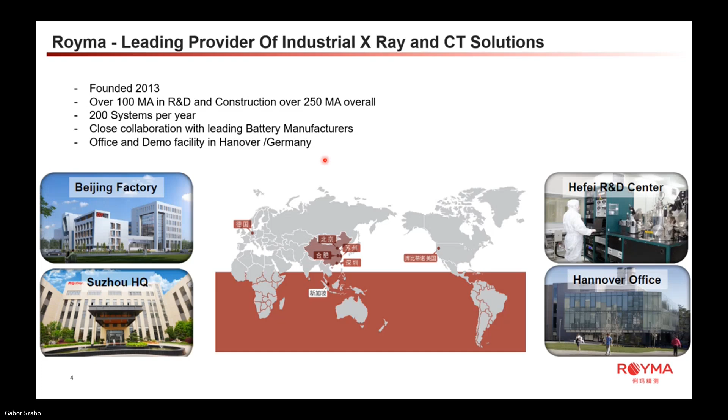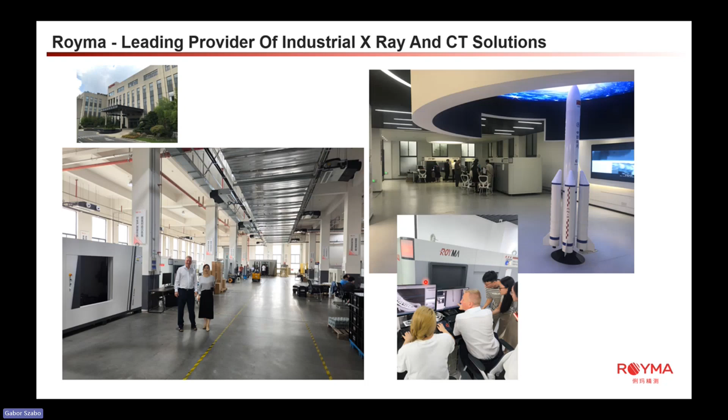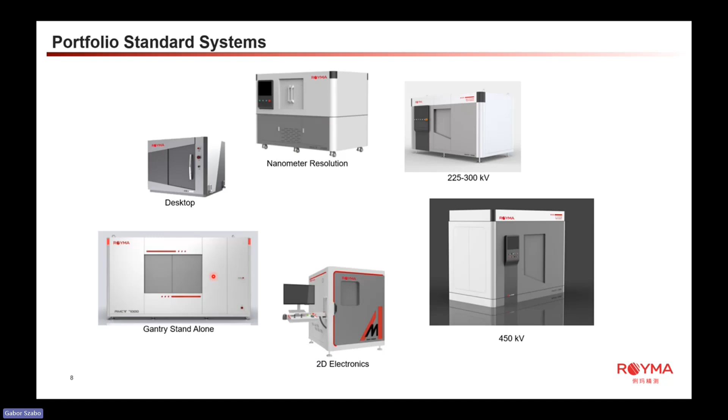What is already a bit special is such a laboratory system with a gantry system inside. These laboratory systems are not a topic for today, but perhaps also interesting for you to know that we have also very special systems. Topic for today is more our inline capacities. And as you see here, you see again and again the name gantry. After this meeting, you will know exactly what we mean with gantry, and you get also insights about the planning of the productivity, also a real task about the productivity on the next pages, which is the topic for this webinar.

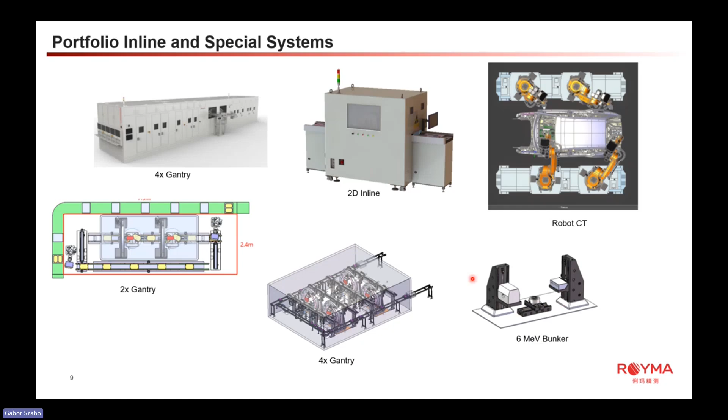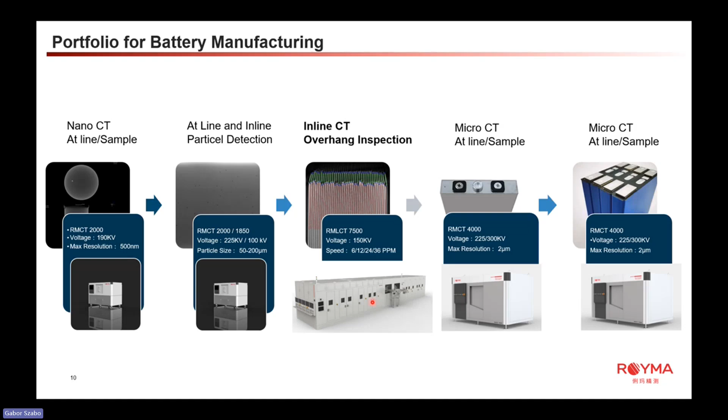Then we have here our inline systems; we hear more about them on the next pages. And of course, we use the standard laboratory CTs, which can all work together with robots to scan also a whole cell or whole module. So the inline system doesn't fully replace the other CT systems. It's an add-on. And on the next page you see some figures so that you understand how you improve the productivity with such an inline 3D system.

Some of the Chinese manufacturers also use our systems before the canning. Here it's not 100% sure why they do it. One point is you can scan a bit faster before the canning with the systems. That's true. And I guess because these are the really big manufacturers, they simply make experiments in single production lines to see the effect if you scan before canning, after canning, or before and after canning. This we also have in China. Our recommendation is to scan after the canning and after the welding.

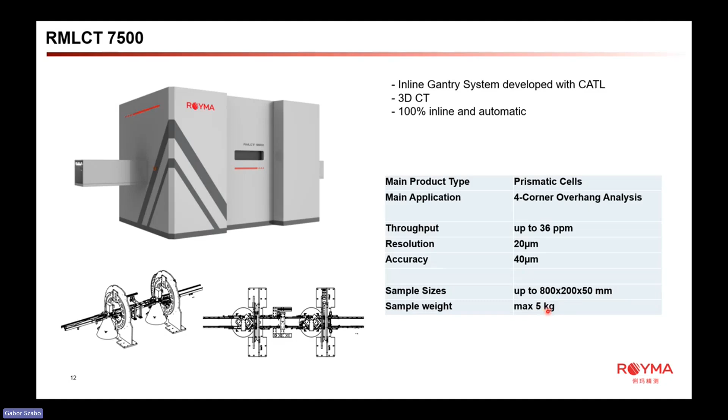and also here the 200 millimeters are not a deadline. Also, if your sample is a bit wider, we can scan the sample. The sample weight with 5 kilograms is absolutely sufficient for all standard prismatic cells.

Why did CATL start development with Royma for a 3D system? CATL also used inline 2D systems in the beginning. They have the advantage that they can easily get a very high throughput, but they have the big disadvantage that you have a high misjudgment rate with a lot of false positives and a lot of missed failures.

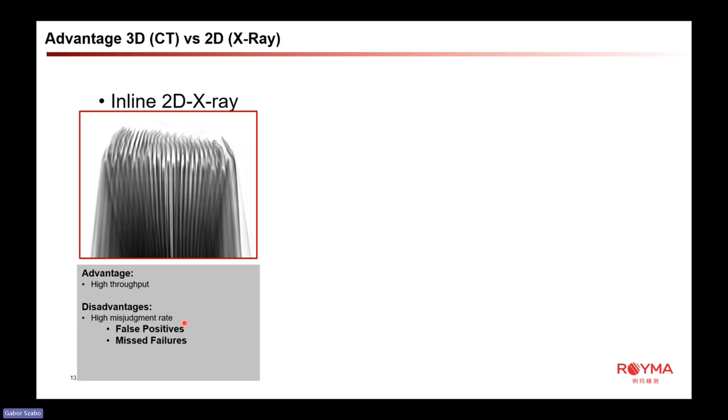That's why it's very typical, especially in the beginning of production and the ramp-up phase, that customers in China used at-line 3D CT, and also in Europe, the plans of a lot of gigafactories are to use a lot of at-line CTs in the ramp-up phase. The advantage of the at-line CT is that you have a high accuracy, but of course a very low throughput.

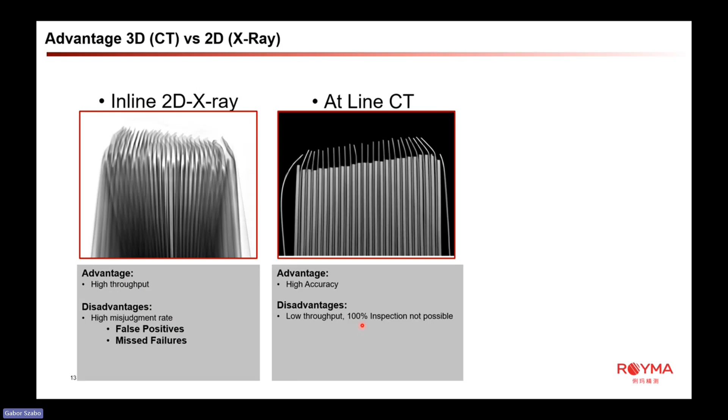And we discuss at the moment also plans to use several CT machines at-line. And here we have to go really into the details in the next weeks, whether this is really necessary or if we can reduce the number of at-line CTs and replace them with inline CT. This will be an interesting discussion in the next weeks.

Together with CATL, we developed the inline 3D CT, which combines the advantage of the high throughput from the 2D systems with the low misjudgment rate from the 3D systems. And you get with these systems a very fast ROI. As I told you, on the next page you get more information about the return on investment.

There are also disadvantages, of course, of the system. It has a bigger footprint than a 2D system, so you need more space in the factory. And with the inline 3D systems we scan only the edge of the cells and the upper end and the lower end of the cells. So typically we don't scan the whole cell with the inline 3D CT. So there is still the necessity to make statistical process controls with at-line CTs.

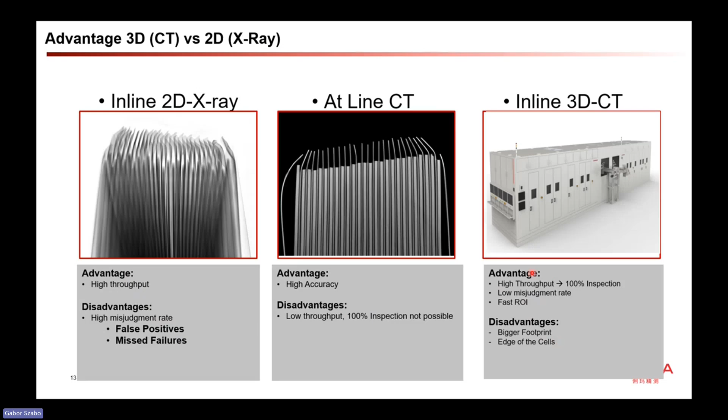Here you see some 2D images, simply to see where the problems are and why you have a high misjudgment rate with the 2D X-ray. The 2D X-ray is very fast, but has the big disadvantage that you always look only from one direction through the prismatic cell or through the edge of the prismatic cell. And depending on the direction, you have limitations in what you can see and what you can analyze.

And here you have a very typical limitation. For us, for the human eye and human brain, it is very easy to analyze this image and to see that these cathodes already look... I'm not 100% sure if they are okay, but I would say they are okay. The overhang seems to be okay.

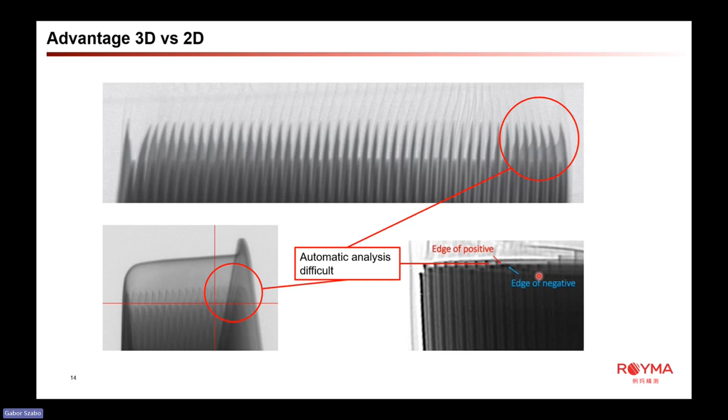For an automatic analysis, such an image is extremely hard, up to impossible, to analyze correctly. And in the end, it can happen that you sort out the prismatic cell, even if there is no damage or no failure inside. Also here you have an image which is very hard to analyze for an automatic 2D system, and also here you have a kind of image where it is simply hard to look through it and to make a clear decision if it is okay or not okay.

I told you that in China, and this is also special information from China, the gigafactories always scan all four edges, and they have the failure. And if they have the failure, we have to expect that we have the failure in Europe too, that only an edge of the prismatic cell is folded, like you see it here in this image. Here in this case, the cathode is folded, and you see the electrodes by themselves are lying quite perfect over

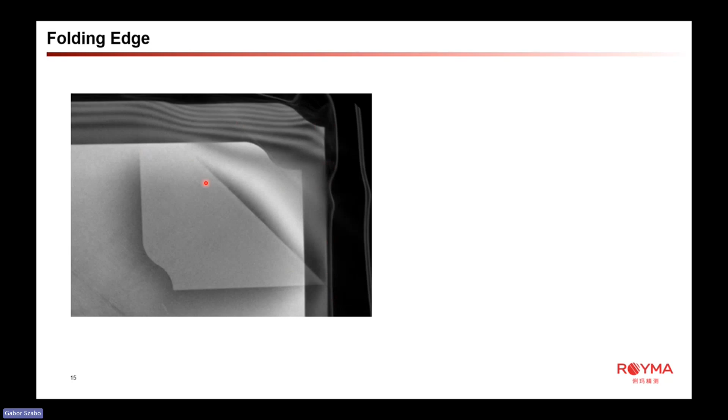the other cathodes, but you have these problems with the folded edge, and that's why always in China the customers scan all four edges of the cells. Here in Europe, I got the approach in the last 2 years from customers that they have the idea, or had the idea, only to scan two

diagonal edges to see if the electrode is lying a bit wrong or a bit tilted, but you wouldn't see such a folded edge if you are looking at the wrong edge with the analysis. So this hint from us: from the beginning, start to plan a four-edge analysis of the electrodes.

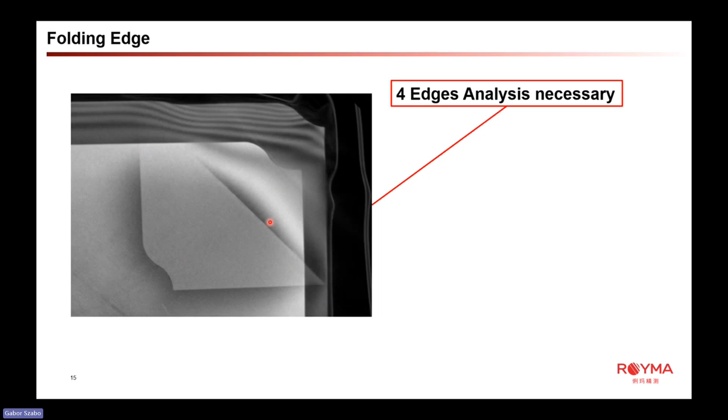And I got the figures from China that between 10 and 40% of all prismatic cells are ejected at the overhang inline checks, especially from the 2D solutions. And the 2D solutions have a false positive rate of 10%. So 10% of the ejected cells are false positives. So it means that between 1 and 4% of the production is simply false positive and is lost for the production.

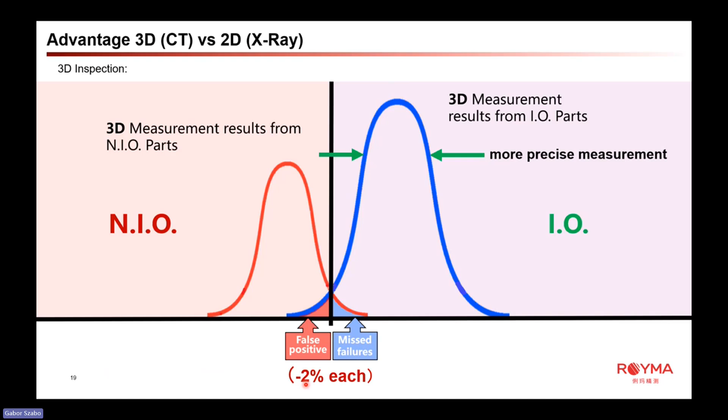On the other side, we also have a high rate of missed failures if you use the 2D measurements. With the 3D measurements, you have a dramatic decrease of the false positives and the missed failures. I got the figures from China that the false positives and the missed failures decrease around 2% each, absolutely, for the whole production. And the decrease of the false positives alone, about 2%, is already a productivity improvement of 2%, because then you process these good cells further in your process line, and you simply have more good, in order produced cells, and 2% more productivity.

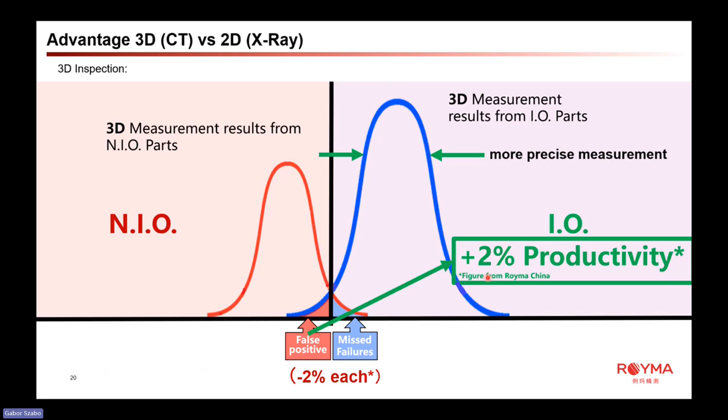Also here I made the remark, these are the figures I got from Royma China. And this is important information from me to you, and also a question from me to you, that I want to make more tests together with you in the next months and get more information from you with your experience and your figures. Of course, I cannot share the figures freely because we have NDAs with each other and competition issues. But it would be important for me to get a validation or verification of these figures, so that I know how valid it is here in Europe.

How we make our forecast for the return on investment. And we start with the false positives. And here I was a bit astonished. Some of you already have running production lines or are still in the ramp-up phase. But the simple question, how many of your cells are ejected from your inline inspection, especially for the overhang, I didn't get the answer from you. And I'm a bit wondering about that, because for me it's very clear that you need to know how many cells you eject at the different inspection points.

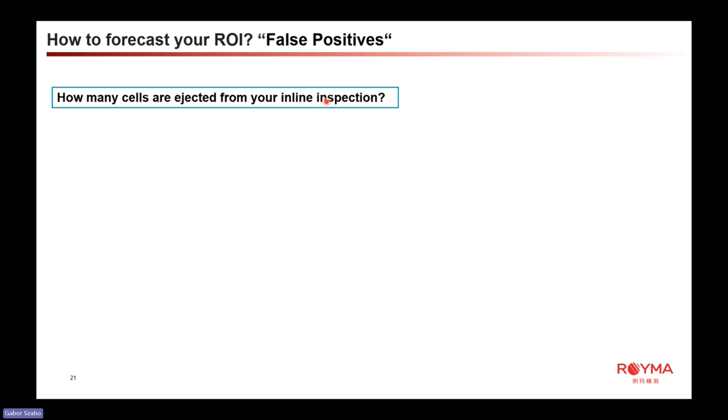And when I ask you for the ejections, I also get some questions back from you. For example, which kind of stacking the Chinese competition manufacturers use, and how these stacking methods influence the ejection rate. And here I cannot give you a clear answer at the moment. We know that we have Z-stacking, cut and stack, and fly stacking, which is a very modern kind of stacking. But we have no figure yet from China which stacking causes what ejection rate

in the inline inspection. And also important is that the previous process steps already have an influence on the ejection rate. And this is also interesting for me to learn in the next months, what the influence of these different process steps and stacking methods is on the ejection rate. Also important for the ejection rate is the cell design you have, the thickness of the electrodes you use.

This is simply a factor which influences the ejection rate, and when you change your cell design, you will also have an effect on the ejection rate. Important also is the kind of pressing you use after the stacking.

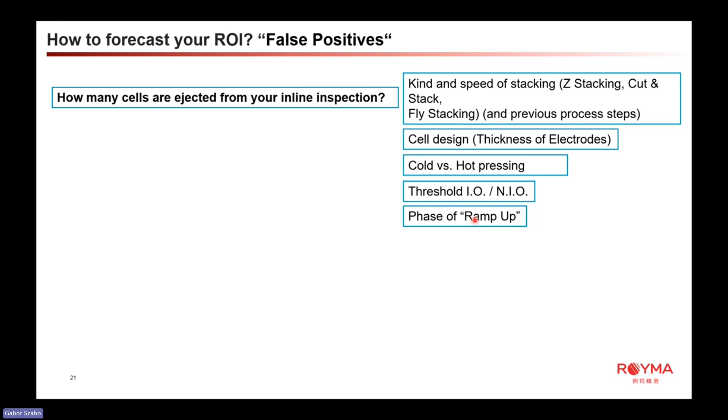And of course, important for the ejection rate is the threshold, where you set the threshold. And important, and we have to take this into consideration, is in which phase of the ramp-up you are. When you start, you have a very high ejection rate; when the production is running and you find the right process parameters, then the ejection rate will be lower. This is something we have to take into consideration.

When you count the ejection rate, this is simply counting the amount of cells which are ejected. Then we have to check how many of these ejected cells are false positives. You can use the laboratory CT you typically have in your factory to test the ejected batch and see how many of the cells are false positives. If you don't have a laboratory CT, we can also do such tests for you in Hanover. We have the abilities to do that.

And then, this is the final point to calculate the ROI: we make the counter check with our Royma systems in China. There we have such systems and we can test your batches there. Then we have a figure for how well our system worked with the batch, and then we have a clear idea for the return of investment.

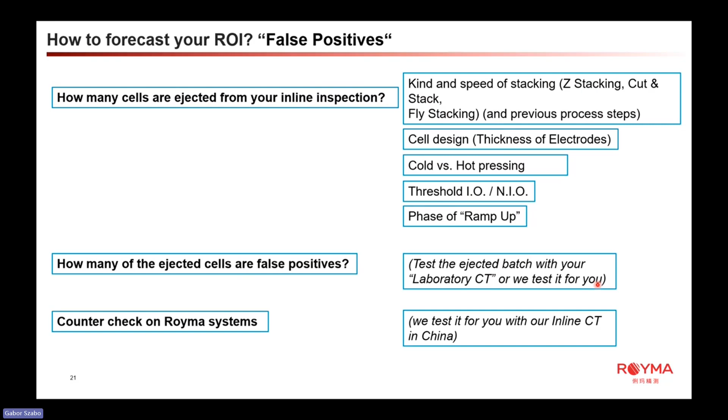How do we make it for the missed errors, for the missed failures? The return of investment effect from the missed failures is not as big as the effect from the false positives, because the missed failures are normally found later in the process, in later process steps like the formation.

But of course, you have production costs on the cells which already have a failure. So normally, if you find the errors in earlier process steps, you save a lot of money. Especially the formation is very expensive, and if you have formation capabilities free for good cells and can produce good cells, that makes much more sense than producing cells which already have a failure inside. And the risk that you deliver cells with a failure to your customer is higher if you don't sort them out in production.

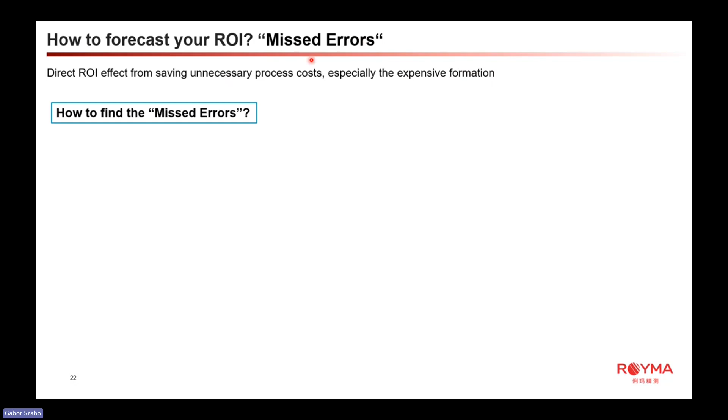So how to find the missed errors? One possibility is that you make a statistical check after the inline inspection, so you simply take out the cells which are not ejected and check these cells to see if they have a failure, if they are wrong cells. You can do this check directly after the inline inspection, or you can take out the cells from the end control of your production line.

Also a very efficient way is to take the ejected cells from later process steps. So if the formation gives you the signal that the cell is faulty, then check the cell and look at what the failure is inside the cell. Is this a failure, for example, in the overhang? Then we have a typical missed failure in the inline inspection for the overhang. So you have a very efficient way to find these cells.

And also here, make the counter check with the Royma system, which we would do together with the batch of ejected cells from the false positives. So we have the missed failures, the false positives, and the found failures. With these figures from you, we can test our system, get our figures, and then we have a very clear basis to calculate the return of investment.

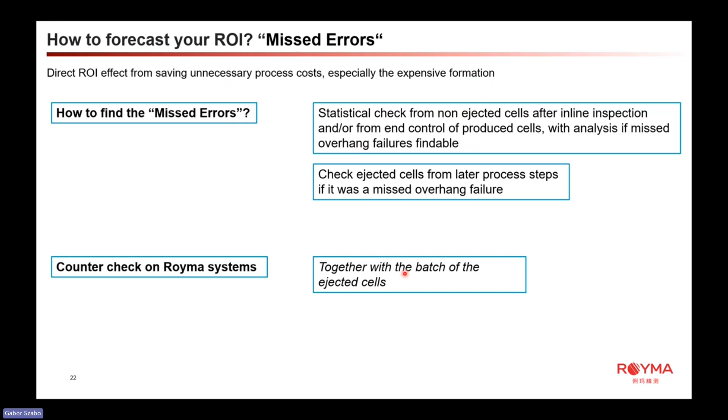If you need my help for these processes to make the statistical analysis and so on, I can help you so that you don't have to reinvent the wheel by yourself. Then it's a bit easier for you.

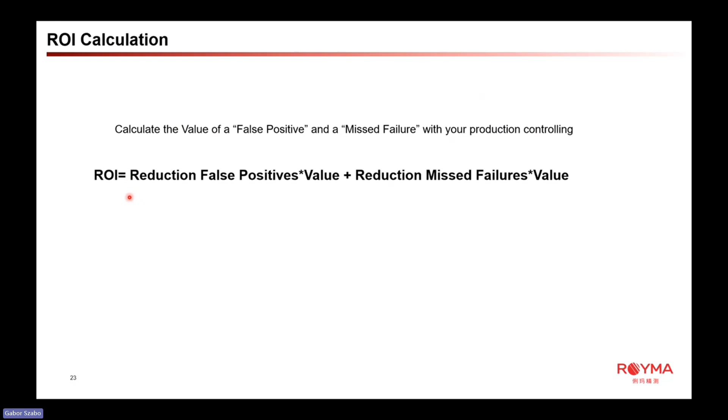I made this page only for fun. Of course, you need for every false positive and for every missed failure a value. You get a value from your production controlling - I cannot calculate this value for you. With these values, we can make a simple formula to calculate the potential return on investment and have a clear figure. With this figure, it's very easy to decide if it's a useful investment for you to invest in an inline system, or perhaps if it's not useful.

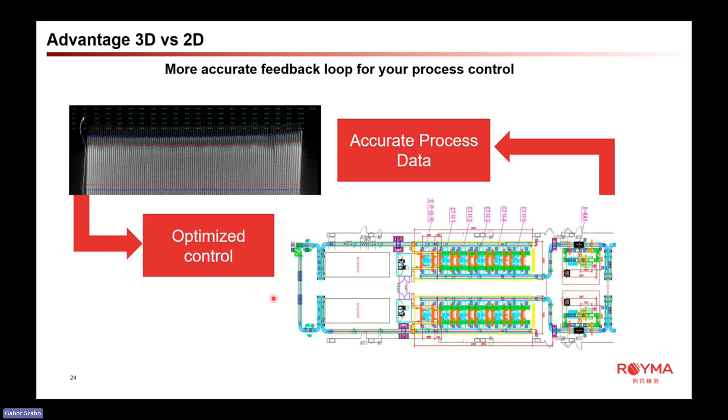There are more advantages if you use a 3D system instead of a 2D system. You get from the 3D systems much more accurate results, and these help you optimize your process control. From our gantry inline systems, you get more accuracy, and with higher accuracy you have better control of your process before the inline analysis from the overhang. This is an important advantage which helps you ramp up your production and find the right parameters for your production.

Also an important point is that you are future-proof if you invest in a 3D inline solution. At the moment, discussions are running in China, but also starting now in Europe, about how to make a certificate - about best practice or a battery pass or battery quality certificate. It's to be expected that part of this certificate is the use of 3D inline inspection.

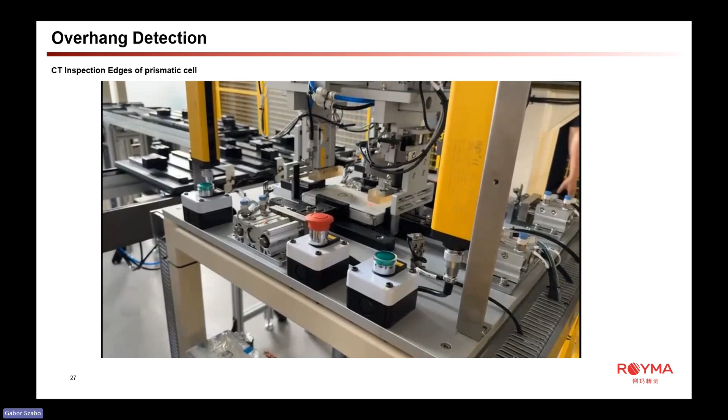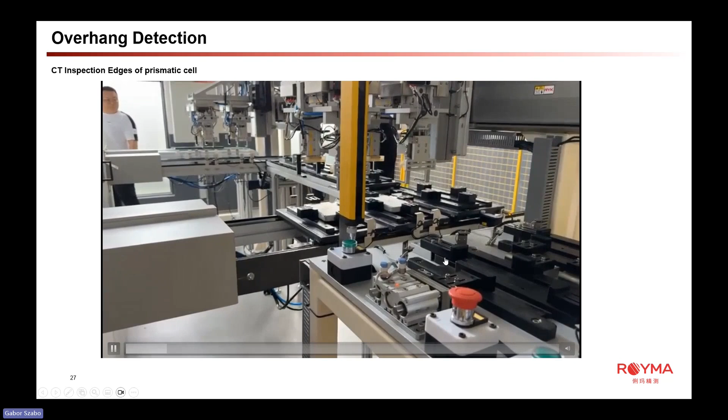And here I have also a video for you. I have to switch off the laser pointer and then start the video. We won't watch the whole video, it's a bit too long, and it's with the original sound from the Chinese colleagues who make some comments about the production line. In this case, it's our test line where we make experiments with software, with hardware, with different customer cells.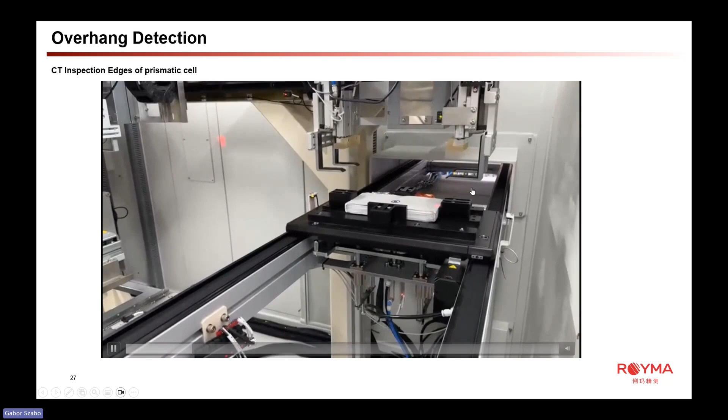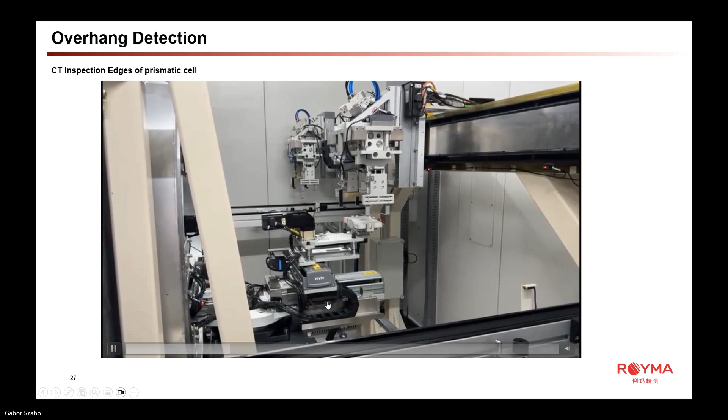There you see the cells coming inside. We have several pickers inside the system to enable high throughput, even if the pickers themselves move slowly to secure the cells. Then the pickers put the cells on this round table, and the round table drives the cell inline through the gantry system, the same from the other side, like you see here. And then we make the scan of the edges.

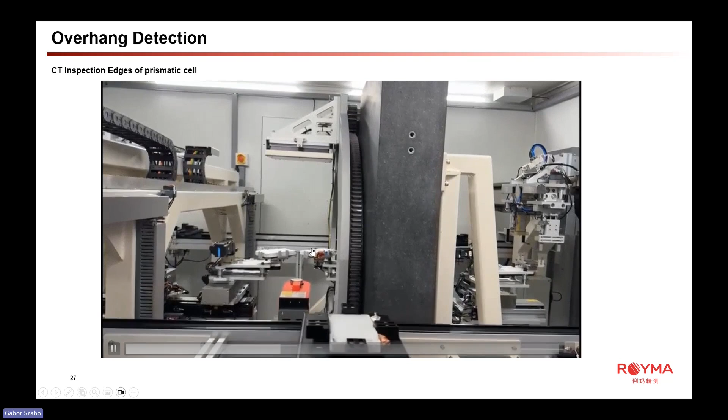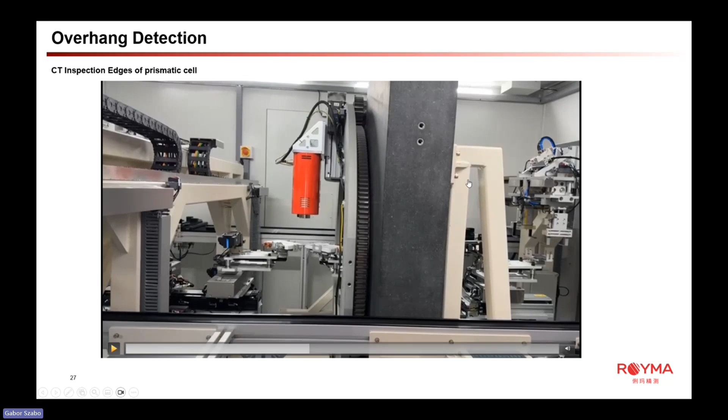In this case, we have two cells together, so we make with one scan two edges. And very often we can put two cells over each other, so we make four edges with one scan, or sometimes we can put three cells over each other if the cells are very slim. Here I stop the video because I guess at this point it's already very clear how the system itself works.

Here you see how we scan it - you saw it in the video. We have edge to edge, and we make a field of, in this case, around 64 millimeters, where we scan a range from the cell itself. And we make cuts 8 millimeters away from the edge of the cell, where we make the overhang measurements, in 2 dimensions.

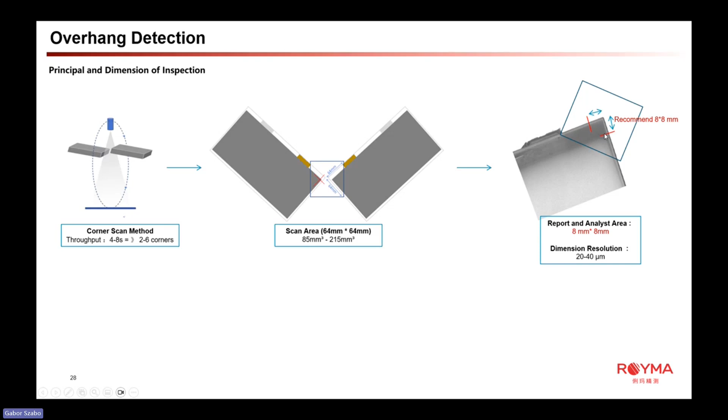And here you see how it looks like in practice. These are customer samples, and you see here how we play together with inline systems and also with offline systems. In this case, the customer wants to scan all four edges, A1, A5, C1, and C5, but also the welding at the position A2 and A4.

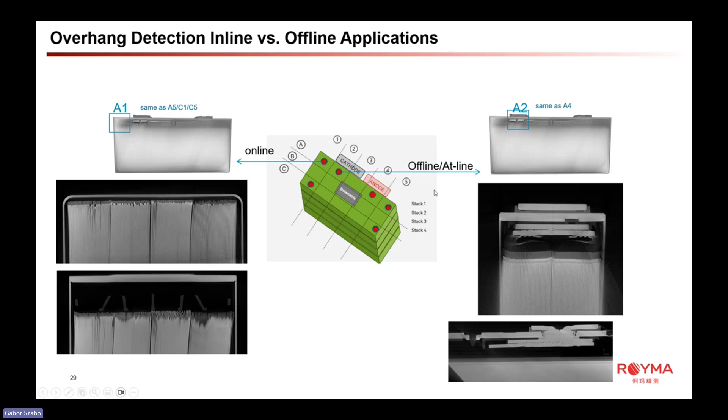What you see is that we do the edges online with our inline CT - you see the images here. And the welding we check offline with statistical process control, and you see here how we check the welding. This is very typical in China and will be the same in Europe, that we combine inline and offline CT systems.

Here you see how it looks like, such a 4 up to 8 second scan from such an edge. This is the original scan quality. You see it's a bit blurry and a bit noisy.

We use artificial intelligence to optimize the image, and then we use an analysis made by Royma themselves to analyze the overhang, and you get a data file in the format you want with the results from the scan. And this information you get into your ERP system or production system, so you can work with these figures. And of course, we sort out the cells which are not okay.

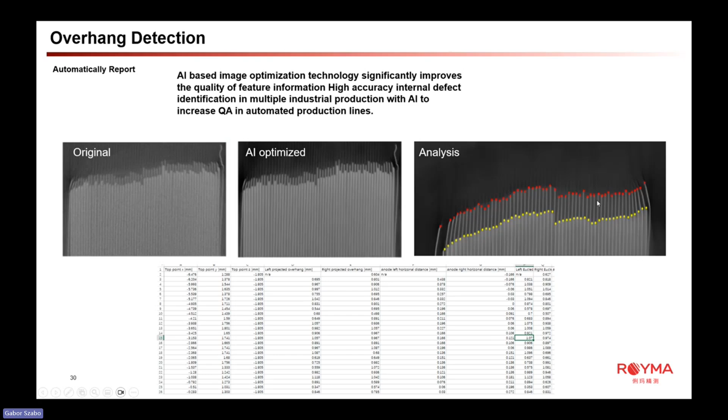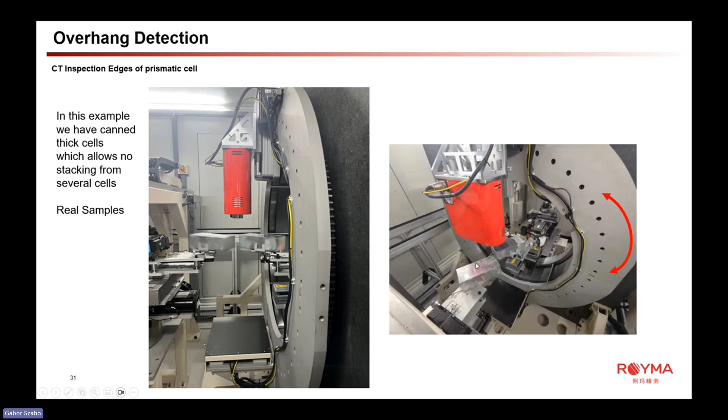Here you see it, how it looks like, also here with real customer cells. That's why I blurred the cells a bit, so you cannot see any details from the cells, and you see how it looks like.

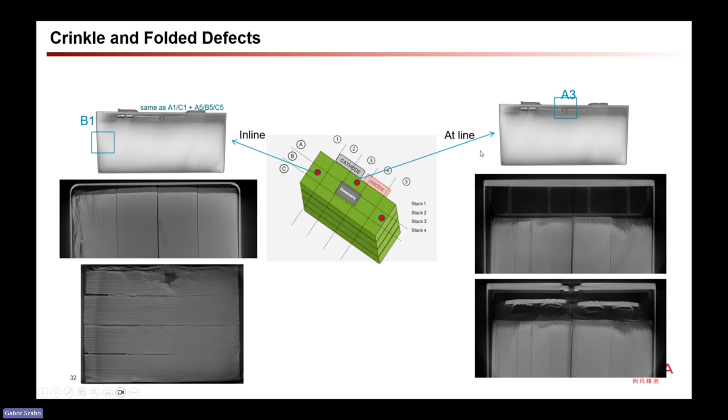Here you see an image from a whole cell, how we do it inline, so you have simply an impression how it looks like. And here you see how we position the cells if we make such a scan on the top of the cells.

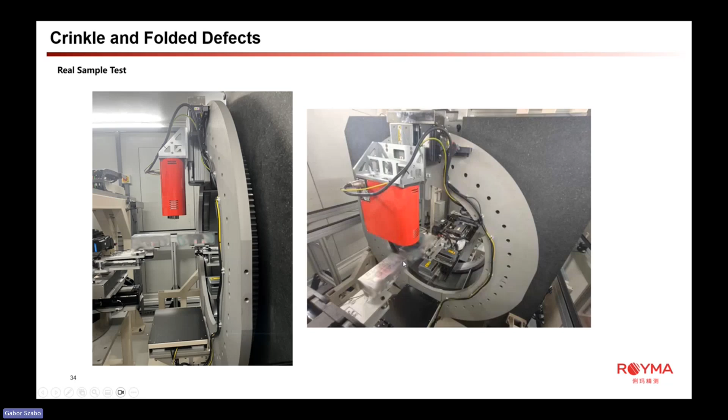Okay, here are only some overviews for you. This is such test equipment we saw in the video, only with one gantry to make general tests, and also with your batches you send us. Hopefully we can test with this installation.

And this is a typical installation for the customers. Here you see we work with 4 gantries to ensure the throughput. In this case, we use 2 gantries for the overhang detection, and 2 gantries for the crinkle detection. And you see here, in this case, we have 16, or over 16, 8, 16, 32 pickers. With the amount of parallel working pickers, we ensure the throughput of the installation.

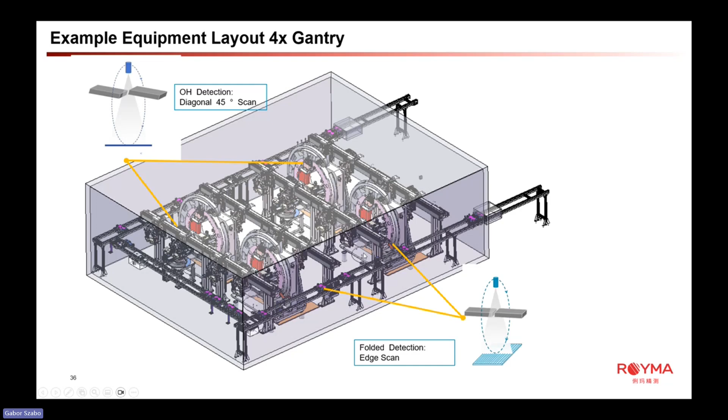Here you see it from above, so you have an idea of the space. And I don't know what we use this space for, but the system itself is 10 meters long, if we take the entrance to the measurement, and it's 6 meters wide.

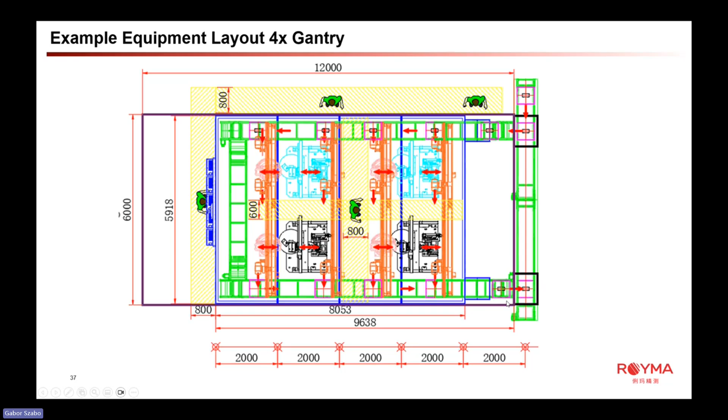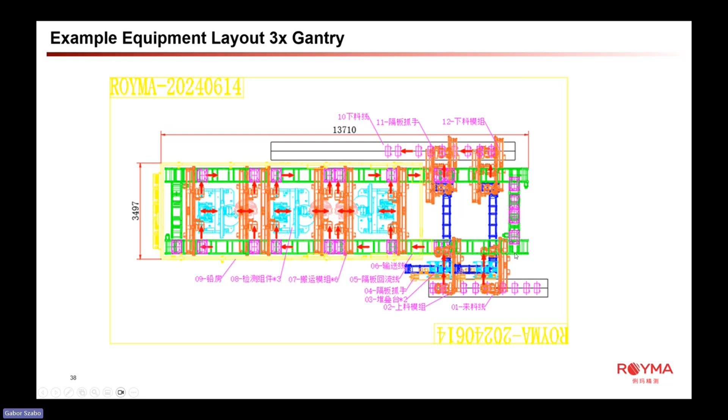And here you see another kind of installation. So here we are very flexible, depending on your factory, in how we make the setup for the systems. And here you see a setup with 3 gantries which work parallel, and here is the production line from you, where we take out the cells.

Here also again an overview about the main components. Of course, these are the beam safety cabinets. You have the pickers, the round tables, and the gantries, and these are the main components which we use to configure the installation for you.

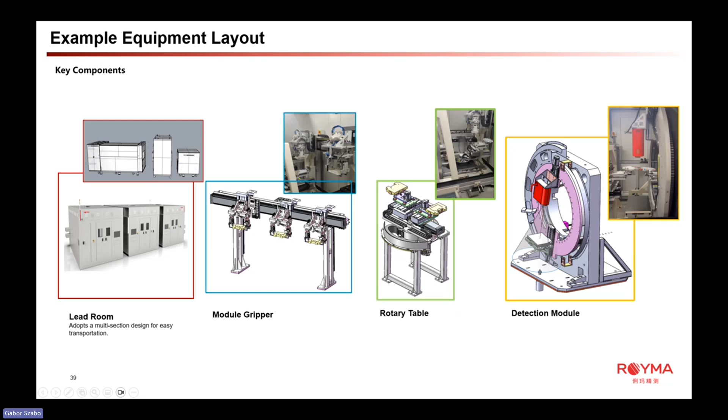And here also, for your understanding how it looks like, you see an example for such a measurement for the throughput we do in our factory in China. And here you see the single points of the process, the timing. You see the overall timing for one cell, and we have in this case 16 processes parallel, so we come to a throughput of nearby 23 ppm for this application.

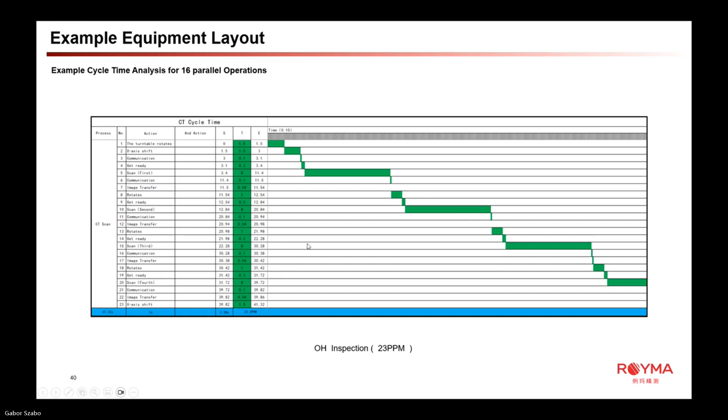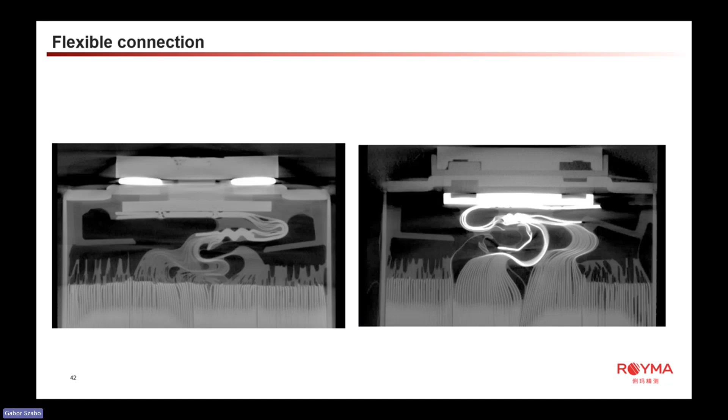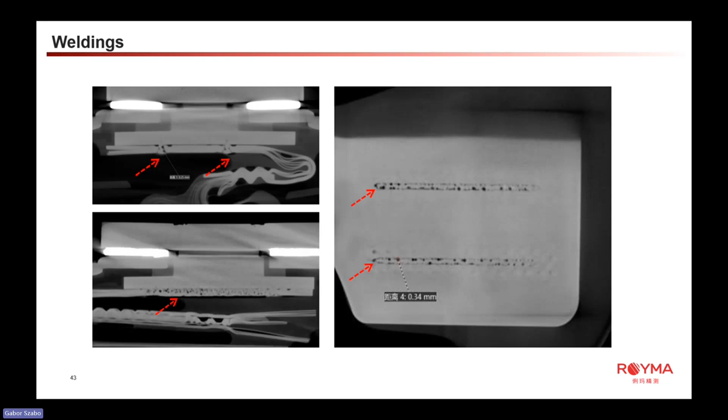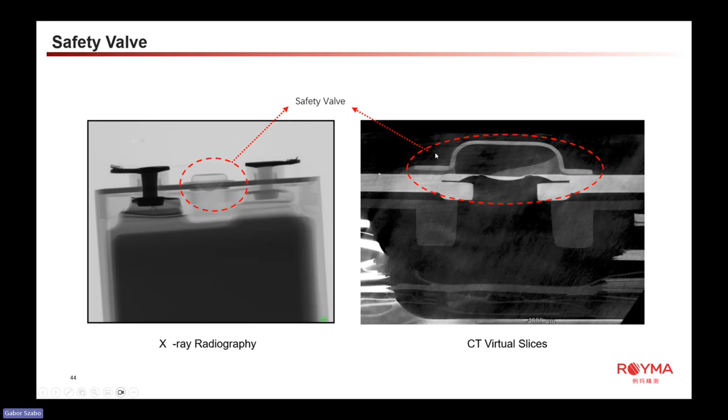Here you see the safety valve. In this case, we have two images, one image from a 2D inspection, one image from a 3D inspection. Both are possible, depending on the kind of your cell.

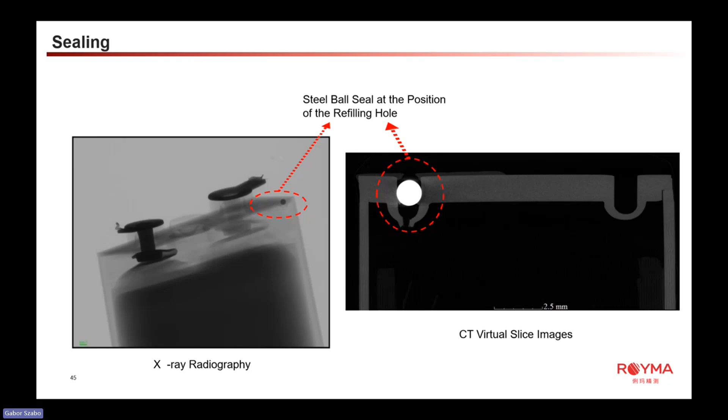And here you see such a sealing ball, which is also scanned and analyzed to check if the sealing process is correct. And here also again some weldings and some assembly overviews.